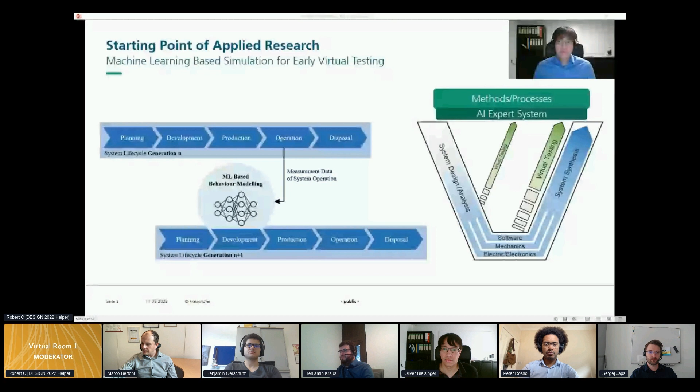And when you look at the right side of the slide, you can see especially this early virtual testing in comparison to late virtual testing, where you mainly need simulation models that don't have to have 100% accuracy, but maybe 95% accuracy is good enough to do some design space exploration. So this was our main motivation. And furthermore, we are also thinking about going in the, let's say, field of AI expert systems. So AI-based systems, which may help in these different design steps regarding design space exploration. So this is one of our main motivations.

So let me go more in detail regarding the automotive case study we were looking at with our research. So the data was acquired from an automotive supplier, and we used it for our data-based approaches or our machine learning-based simulation. Let's say the challenge was really regarding design space exploration, because we had software. It was a software for an energy management system for a hybrid vehicle. And we were looking at the so-called state of charge from the battery system. And we were trying to optimize the state of charge based on different design parameters from the software. So we were mainly focused on the software.

One main impact regarding using machine learning-based simulation is the speed up, really quite fast speed up of design space exploration, because you have a lot of design alternatives, so a lot of parameters you could set. And we were looking at how the software parameters influence the overall state of charge after simulating a specific load cycle for our hybrid vehicle.

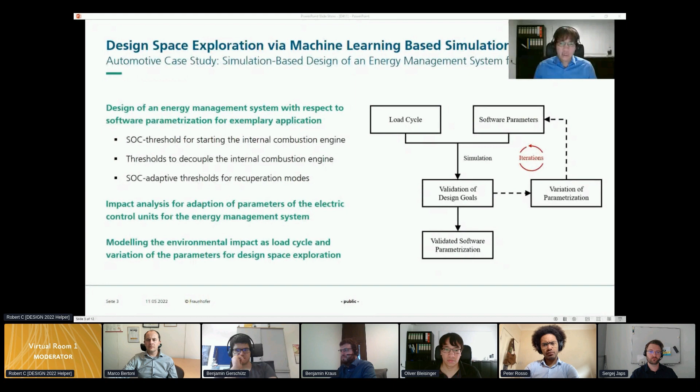So we had different kinds of concepts for this hybrid vehicle regarding the energy management system. And then we checked which state of charge would actually result from this design and this given load cycle. So one of the main tasks was also modeling these different types of simulation models. And as I said, we did this data-based.

And here I would like to describe how we actually did the modeling, or how we set which components need to be modeled. And there, of course, there was a special emphasis on the electrical effect chains. So we looked at different electrical components of the hybrid vehicle. And there we tried to do a specific system cut, or cut a specific part of the overall powertrain out of the system, and then try to model the different components.

So the components we were looking at were the e-machine, the electrical inverter, and of course the battery. For these specific components, we were recording measurement data at the supplier and used this to model different kinds of simulation models with neural networks. So it was kind of neural net-based prediction models.

And we put all these components together, as you see with the different types of inputs and outputs of the single models. And then we were able to do this design space exploration with this machine learning-based simulation approach. One main benefit, as I already said, is that you don't need specific domain knowledge to model these different types of simulation models. And you are quite fast, because execution of neural network models, once they are trained, is quite fast. And this was one of the main reasons why we said, okay, let's try to use these machine learning-based models for design space exploration.

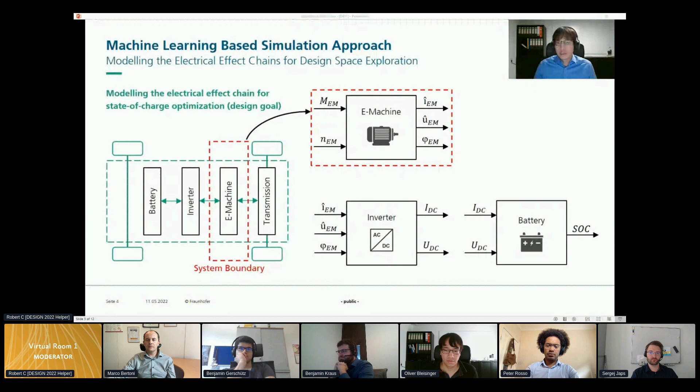So now I would like to give you a short overview of our main key results regarding the machine learning-based simulation, or the specific neural network models. So we did some training runs, and we varied different hyperparameterizations for the machine learning models, and looked for the overall best models we could find. Of course, we did this systematically. The details are in the paper.

And now, as you see on the top, there are the 3 different single component models we were looking at. We have quite high accuracy depending on the error measurement you are using. So we were looking at 2 different types of error measurements. MAPE is the mean absolute percentage error. And as you see, for the feed-forward neural network model for the e-machine, we were at almost 100% accuracy, let's say maybe 99%.

For the inverter model, you can see that the recurrent neural network model, the RNN model, was the most accurate, at around 97% accuracy regarding the MAPE error measurement. For the battery model, you can also see in this case for the MAPE 96% accuracy, because the error is only around 4%.

Just to conclude, you can say the machine learning-based simulation approach was, in this special application, very efficient, because we had models which were quite accurate, at least for early testing. So we can say it is useful to use machine learning-based simulation, because you have like 96% accuracy, and this is enough for design space exploration. And if you would like more details, feel free to read the paper.

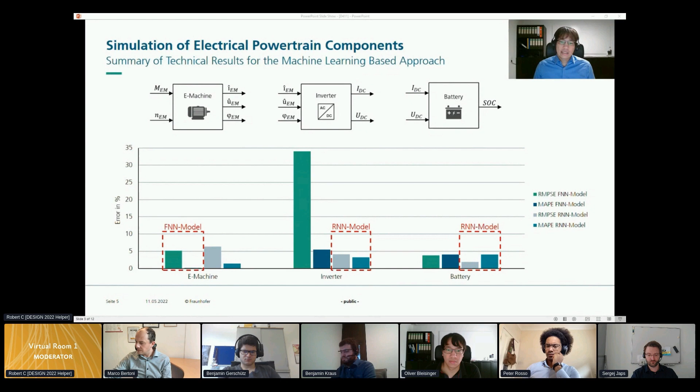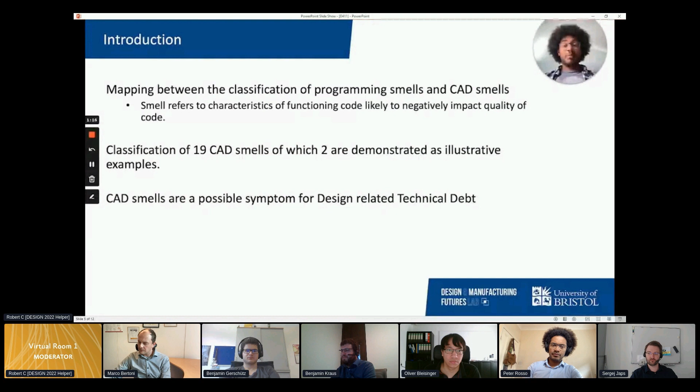CAD smells are possibly a symptom of design-related technical debt. Technical debt is the debt that accrues when you knowingly or unknowingly make the wrong or non-optimal decision. As I mentioned earlier, a series of costs of not being able to reuse CAD can result in technical debt. Some of the reports referenced in our paper highlighted that 49% of industries within the report lost between 3 and 4 hours fixing product data. 32% of these organizations missed deadlines, and 29% of them ordered the wrong parts.

Throughout this paper, we took a top-down approach followed by a bottom-up approach. In the top-down approach, we established a parallelism between object-oriented programming and CAD, and then we used existing classifications because they were based on a more extensive and more available set of data. Then we considered if the classified programming smells apply to CAD, if they're preventable from geometrical modeling systems such as Fusion 360, Inventor, or other programs, and then what environment they are specific to.

We had an external review followed by a bottom-up approach in which we defined the smells from a CAD perspective, associated the smells with CAD-specific examples, and reviewed our classification again.

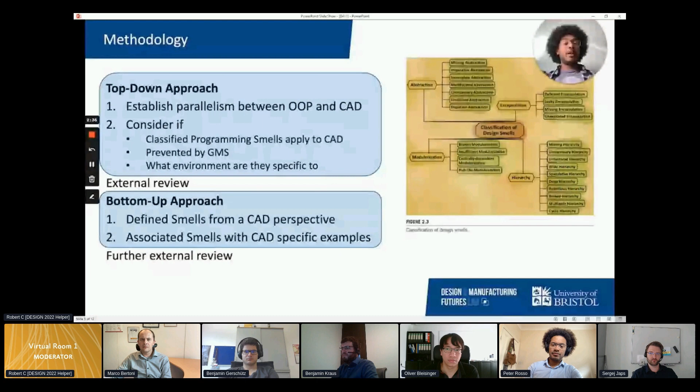In drawing the parallelism between object-oriented programming and CAD, we considered the principles of PHAME, which are abstraction, modularization, encapsulation, and hierarchy. The principle of abstraction argues for the simplification of entities through reduction and generalization, while in CAD, we can see this when drafters change the level of abstraction they operate on, from sketches to assemblies. The principle of modularization is concerned with the separation of concerns and information hiding. This is possible in CAD because the drafter has the ability to break down any physical object into smaller entities.

Then we have the principle of encapsulation, where we create a cohesive and loosely coupled abstraction. This is not as important in CAD as in programming, and there are different levels of information hiding, which some geometrical modeling systems enforce and some don't. Lastly, the principle of hierarchy, in which we try to enforce hierarchy on the organization of abstractions, which have either an is-a or has-a relationship. In CAD, we mostly have a has-a relationship, which is a type of composition relationship. This is characteristic and necessary to define boundary representation and constructive solid geometry models such as feature-based ones, which are the ones we're most familiar with.

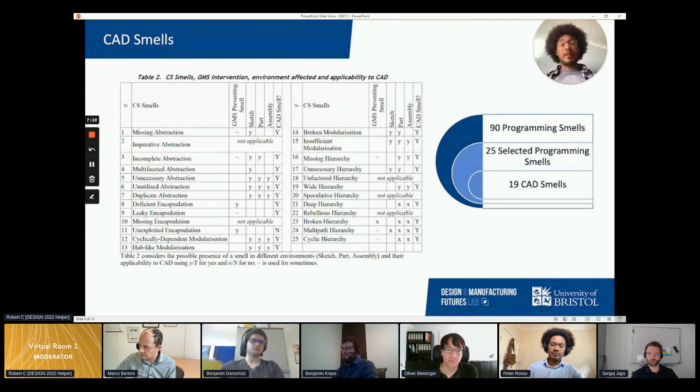The first of the two examples we want to show is duplicate abstraction. This may arise when two or more entities have identical type and common properties besides their position in 3D space. As you can see in the example at the bottom of the slide, we have two objects that look the same but have been modeled in different parts. On the right of the slide, you can see the timeline, the construction tree, in which some of the sketches and features could have been condensed using mirroring, building a more condensed form of the model.

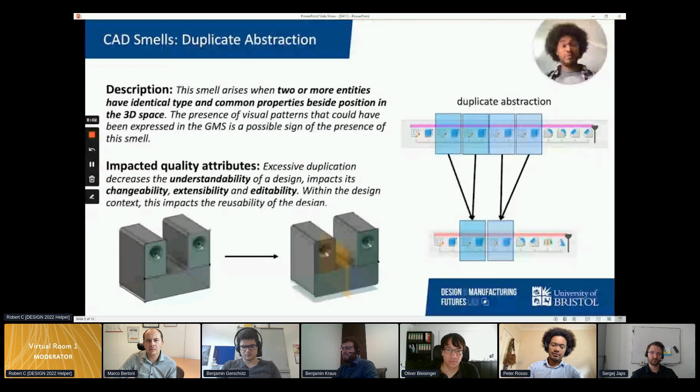The second example is broken modularization, which may arise when data such as dimensions and entities that the drafter should have localized into a single entity are separated and spread across multiple abstractions. Again, we have the same object that we used in the example before, but in this case, as you can see in the timeline on the right, the broken modularization creates a lot more sketches and entities, which could have been condensed in a single sketch, in a single extrusion.

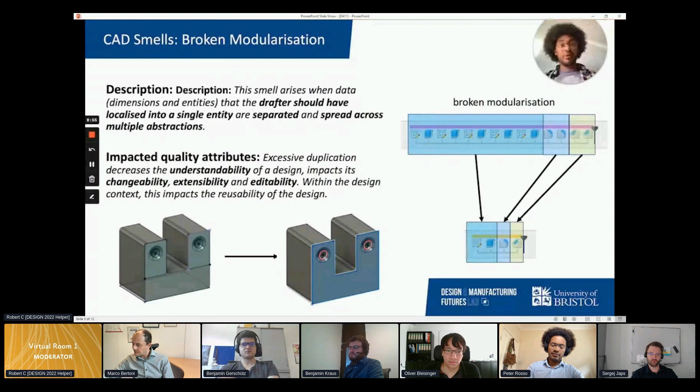In both cases, we saw that the starting point for both smells was the same. Sometimes the same object can demonstrate multiple smells. It is important to start with one and see if others exhibit until you have removed all of the possible smells that are affecting the file.

In conclusion, in this paper we presented a mapping between the classification of programming smells and CAD smells. CAD smells are a possible symptom of design-related technical debt. And this is important because identifying the symptoms can help us address the problem of technical debt through techniques such as refactoring.

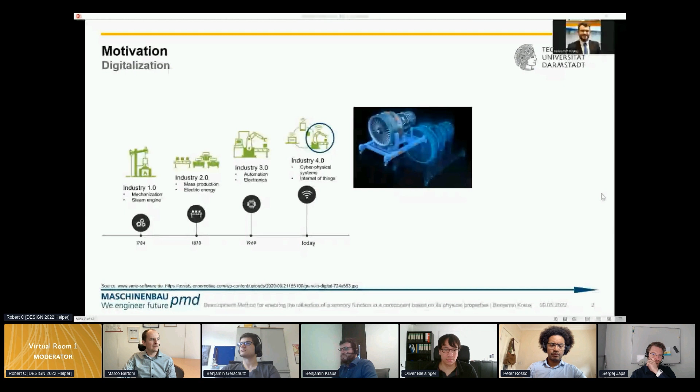For the motivation, why did we create this method? Basically, we're right now in the trend of further digitalization within the industry. And for this, we obviously need digital twins, which need to be fed data, and this data we need to somehow measure out of the system. There are several questions that arise in this regard, especially how can we actually measure there, what quality are our measurements in the end, and how usable are the measurements for us.

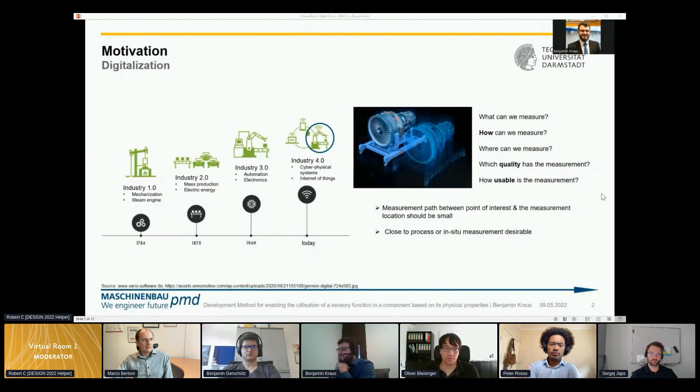What we found is that the measurement path, the length of the path between our point of interest and the actual measurement location, should be relatively small so that we have less disturbances within this path, and this generally leads to better measurement methods. This leads to so-called close-to-process or in-situ measurements, which are desirable to improve the general data created by those systems. How can you achieve such a function?

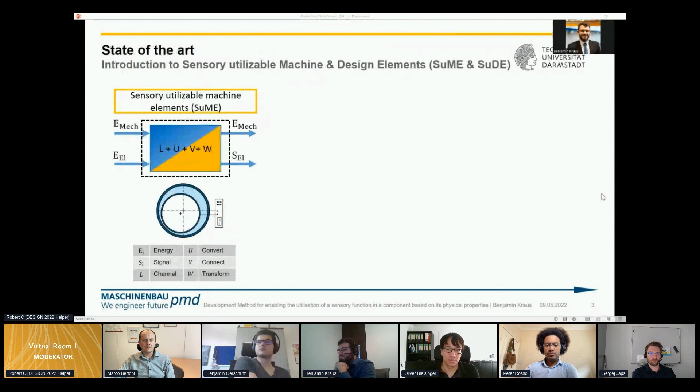One idea is to use sensing machine elements, and one specific subcategory that is very interesting is the sensory utilizable machine elements. Basically what you do here is introduce a sensory function into your standardized machine element, and for the sensory utilizable ones, their physical properties and the sensory function are intertwined, so you use the physical properties of the machine element itself as a sensor.

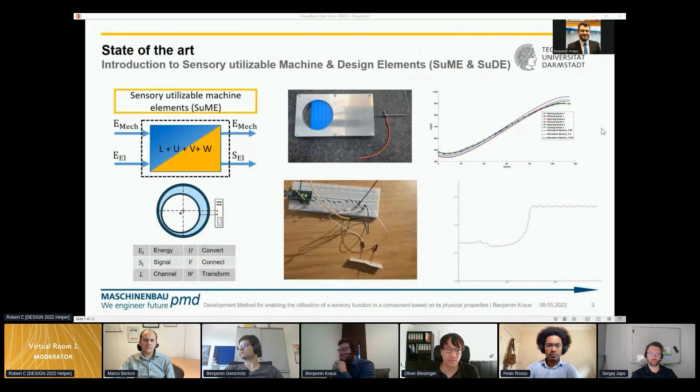Now I want to give you a very short introduction to CK theory. What does CK theory do? It has a concept space and a knowledge space—that's where the name comes from—and those two spaces interact with each other.

Inside the concept space, we have undefined or non-decidable propositions, and what we do is refine our process, structure our process, and so on. In the knowledge space, we increase our knowledge or deduce new knowledge from it. Between those two, from K we can introduce knowledge into our concepts and further subdivide them. Then, in the end, if we found the proper concept, we can put it back into K-space to have our knowledge expanded.

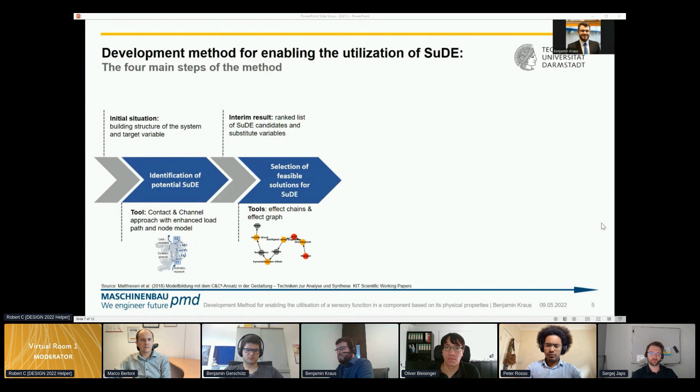Now I want to give you a very short overview of how our development method actually works. It consists of 4 steps. We start with the building structure of the system and our desired target variable. Then we identify potential design elements which we want to use for SUDEs, and with a load path model we use those and put them into an effects graph, using the effect chains generated by this to select feasible solutions.

And out of those, we want to decide which are the most feasible or the most interesting ones for us. So what we do now is a robustness check for those potential SUDEs, using effect chains and the effects graph.

After this pre-selection, we want to do a ranking fine selection. For this, we have a more general weighting system developed for the SUDEs, which leads us to our final ranked solution list of SUDEs.

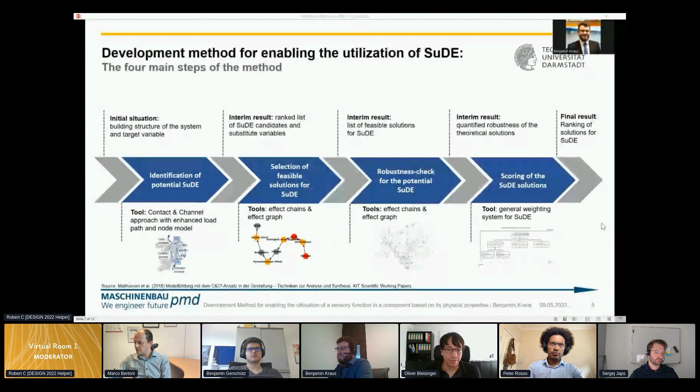Then we move on to the second step. We want to partition our candidates for which are feasible. For this, we expand the knowledge again with the state of the art, do a pre-partitioning, and then by using the effects graph, we can subdivide those possible design elements and rule out some which might not be feasible.

Then we head on to our robustness check, and here we again use the effects graph and the knowledge of our developer together with the disturbance list, which expands the knowledge of the developer again to do a pre-selection of the principal SUDE solutions.

And then we go to our final step, the scoring, done by expanding again our knowledge with the target weighting system and then using that to do a scoring of the final SUDE solutions.

So as a summary and conclusion, what did we achieve? We made it possible that with our proposed method, the SUDEs can be found and evaluated. The method includes the usage of multiple different tools, and specifically the target weighting system, which was designed to rate the SUDE candidates.

Let's look at a company producing bike parts. This company may have parametric standard parts they work with. Each new design has to go through a product validation done by the simulation department. This iterative process creates a pool of simulation data, mostly stored in databases.

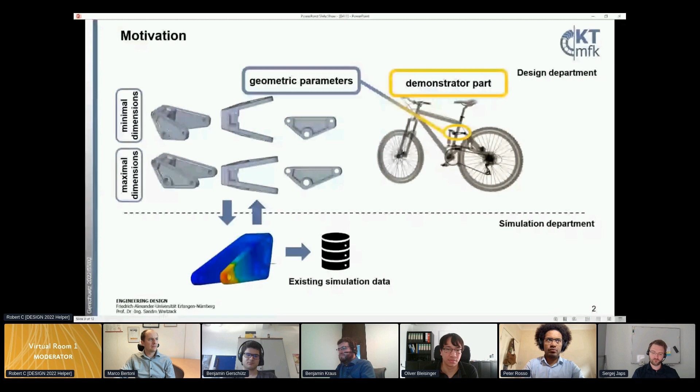Unfortunately, simulation experts are rare. Therefore, simulation departments are bottlenecks in most product development processes, since they are involved in every iteration but are often understaffed or inexperienced. On the other side, the available pool of simulation data is growing, and there are several powerful digital engineering methods to use this data automatically and support simulation or design departments.

We want to realize the democratization of simulation and enable designers to perform initial design checks in real time on their own. The simulation expert is not replaced in this process, but serves as an expert who provides assistance and performs the final validation.

And this first check of the designers is what we want to understand as initial design checks. One drawback of the actual academic methods is that they are encapsulated in individual systems, and embedding in a design process chain is missing.

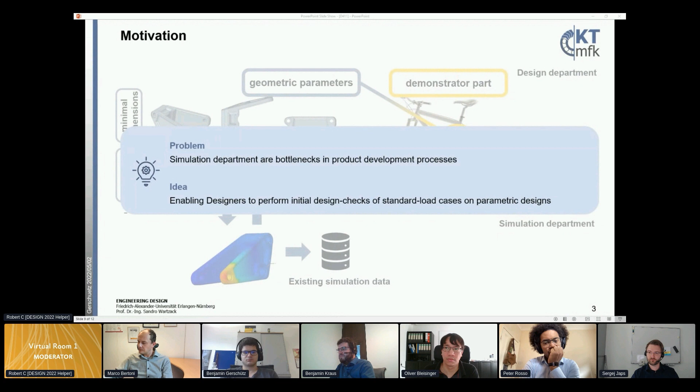So our vision is a system that provides support for the design process from the design engineer to the simulation specialist. So today we want to focus on the central research question: how can existing simulation data be used to realize reliable and easy to use initial estimates by the design engineer?

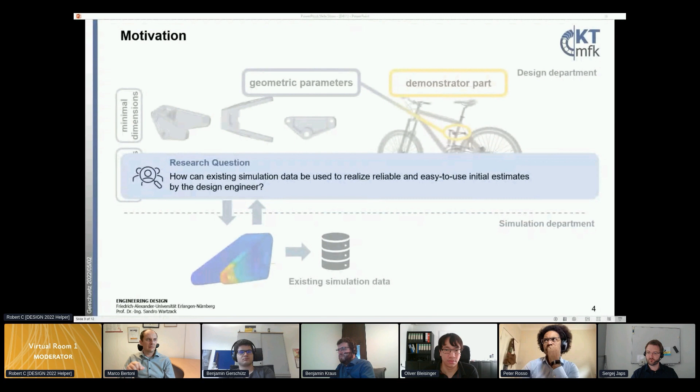In our concept, the basis is a pool of simulation data stored in a simulation data management system. In an industrial context, this system contains all simulations performed in the company in the last years. And a product designer who is going to do an adaptation design of a parametric model now only enters the unknown parameter set into the system through a web interface.

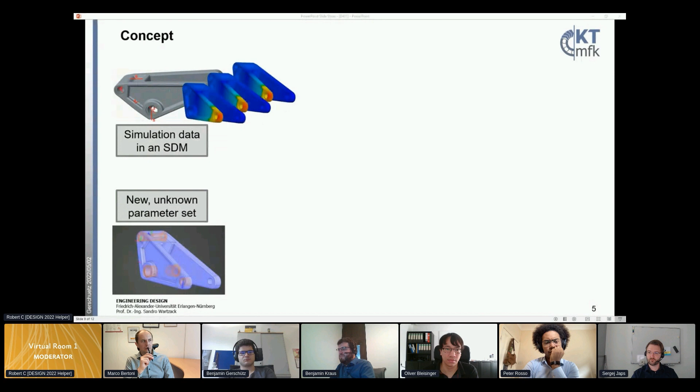The SDM now checks if this parameter set exists in the system and presents the result if it's available. In the other case, an automatic estimation of maximum stress and displacement is done based on the stored data using data-driven methods like regression.

And based on the model fitness factors like the COP or absolute errors, a result quality check is performed. If no sufficient result is estimated, the system automatically runs an FE simulation.

And since most designers are unexperienced in FE evaluations and suffer in evaluating simulations in plausibility, additional support is given in the whole system. The level of simulation plausibility check is based on a neural network which is also trained with the available simulation data pool. And with this, the designer is given a hint if the simulation result is plausible and therefore resilient.

And even if the developer isn't confident in evaluating the results on his own, the simulation specialist can use the generated data to perform an expert evaluation without having to run a simulation himself.

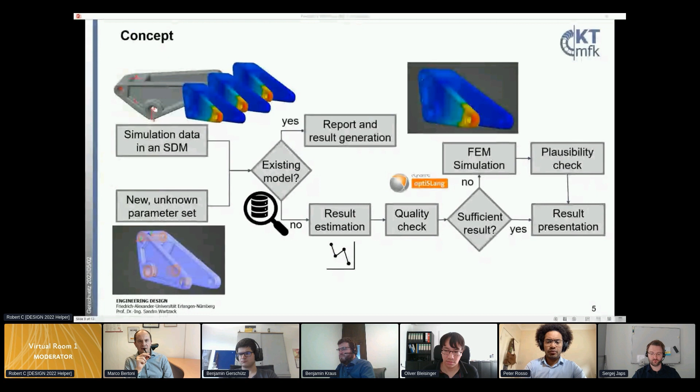The application of this system offers many potentials for the product development environment. By estimating new simulations through meta models, iterations for product revisions can be shortened, which leads to time and money savings.

Since the designers can perform the initial design checks on their own, bottlenecks can be reduced with the simulation department. And the total number of iterations between simulation and design departments are reduced too, since the quality of the designs going to a final validation is much higher and therefore less iterations are needed.

With all the above, the workload in simulation departments is reduced, since no standard tasks have to be performed, and the specialists can use more time for critical problems which need more time.

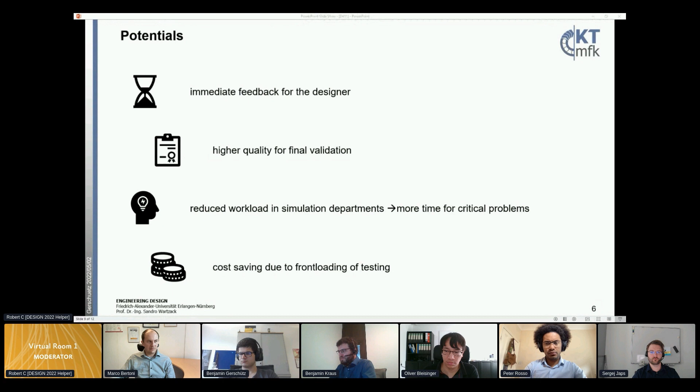As mentioned, the approach has the potential for cost savings due to the front loading of testing in earlier stages of the whole process, and the plausibility check supports the generation of more meaningful simulations and increases the total result quality.

To conclude, we have shown the potential and the power of data to support designers. We can perform initial design checks for new designs and have shown an integrated FEM process chain with added plausibility check.

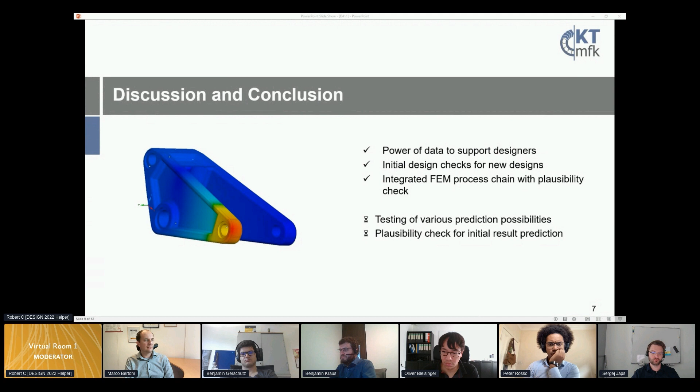In the future, we want to focus on testing various prediction possibilities like regression and case-based reasoning, and we want to check if the plausibility checks are possible for the result prediction as well. So thanks for your attention, and I'm looking forward to the discussion.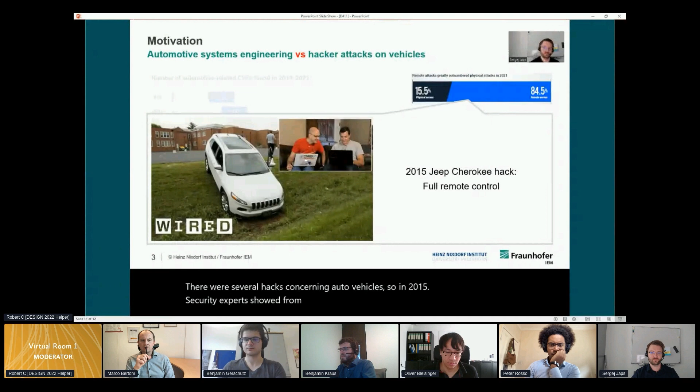Previously, there were several hacks concerning auto vehicles. So in 2015, security experts showed from home office that they can fully remote control a vehicle. In the end of 2020, security experts showed that they can just project something on the street or on a tree and manipulate a Tesla vehicle so that it reduces its speed or stops even if there is nothing on the street.

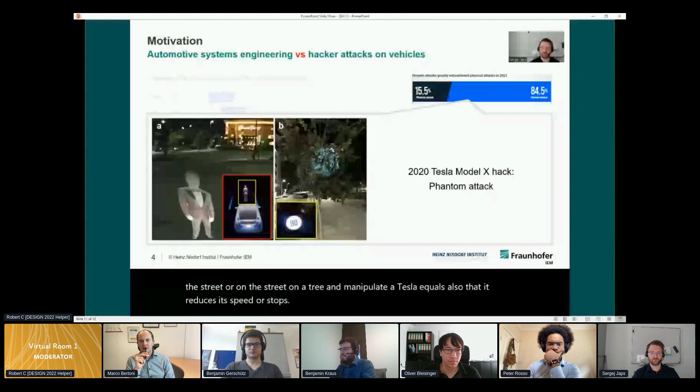I want to illustrate my approach, my example based on the road sign assistant. Suppose we want to develop such a road sign assistant, which is today available basically in every middle class car. Of course, we have people which have to create a concept, and the concept development team consists of experts from different fields, which typically lead other people.

And the question is, what if I want to consider security at this level? Which input can I get from this concept development team? Which input is already available at this stage? I asked people from LinkedIn, and they said they get requirements, use cases, and a system architecture.

The main use case here is we want to have a traffic sign recognition. Based on it, the driver should be warned, and then the speed limitation should be started automatically. Of course, we can document the outcomes of such concept development workshops and security workshops with creating requirements and goals.

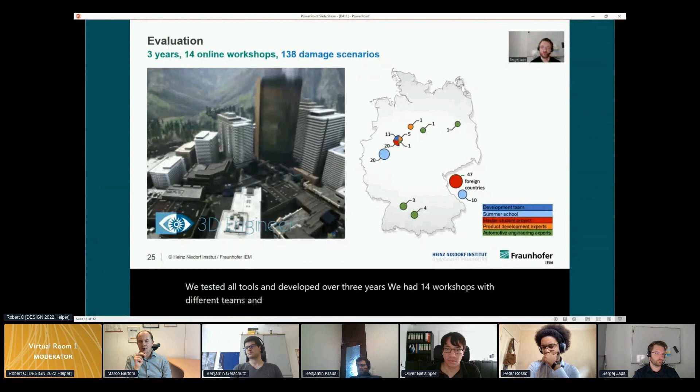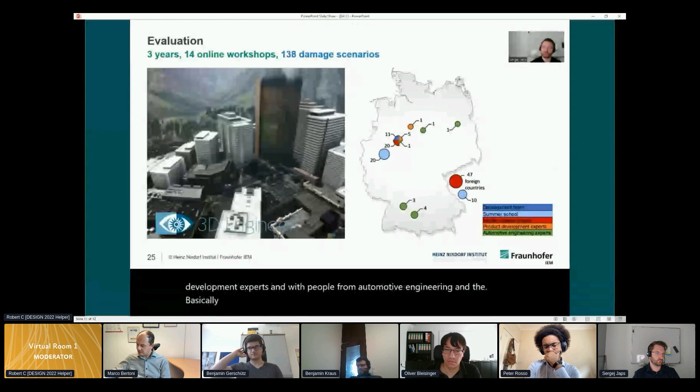We tested our tools and developed it over 3 years. We had 14 workshops with different teams, and identified over 100 damage scenarios using it. And the most important part, we also tested it with product development experts and with people from automotive engineering. And basically the main outcome was that you can use this tool for brainstorming and then finally derive a description which will be used in the later stages of engineering.

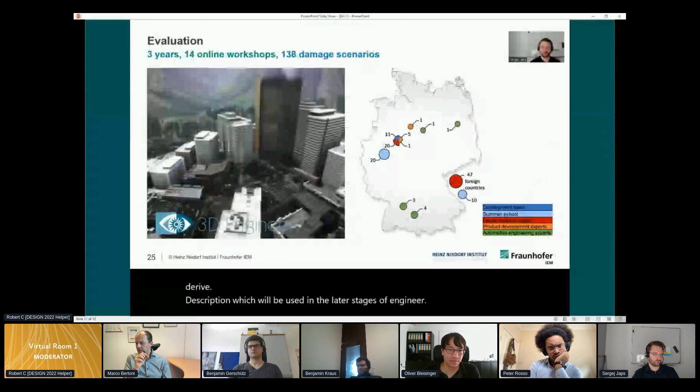Of course, I tested this. Does it work? Yes, it works. So you can show such a road sign on the street, and this will be detected by standard vehicles. Thank you very much.

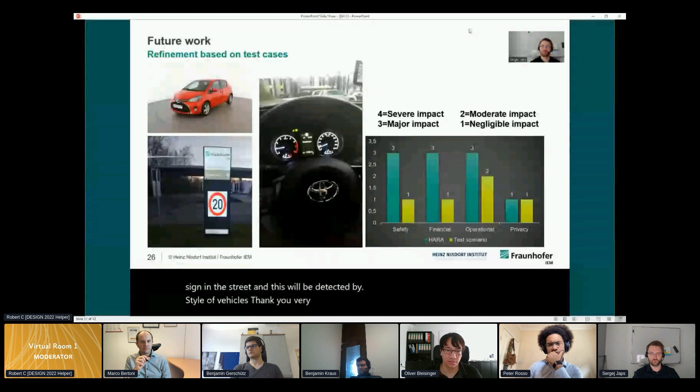Thank you very much to all the contributions and all the presenters. I have seen quite a lot of activity here in the chat, and I will start prioritizing the questions in the chat, and I also marked down quite a few for all of you. I believe we can start in the order you have been presenting. I have seen a few contributions in the chat addressing Oliver. In particular, there is one from Benjamin Gerschütz, our presenter number 4. Benjamin, do you want to ask your question yourself to Oliver?

Yep. So thanks, Oliver, for your interesting presentation. I wonder what database you use for your approach, and if you can quantify the time advantage of your shown approach compared to a classical simulation approach. Thanks, Benjamin, for the question. So maybe I will take up the first part of your question: which database we used for the machine learning-based simulation approach.

It was around, I think, 450,000 data points, and we were measuring at a frequency of 10 kilohertz. So if you know how many data points we have and the frequency at which we took the measurement data, you can estimate how long the data runs. It's just a few seconds we were capturing, but with a very high frequency. But this is for all component models. So we had over 500,000 data points for all 3 components. And we also measured some additional data for validation. So maybe this clarifies the first part of your question.